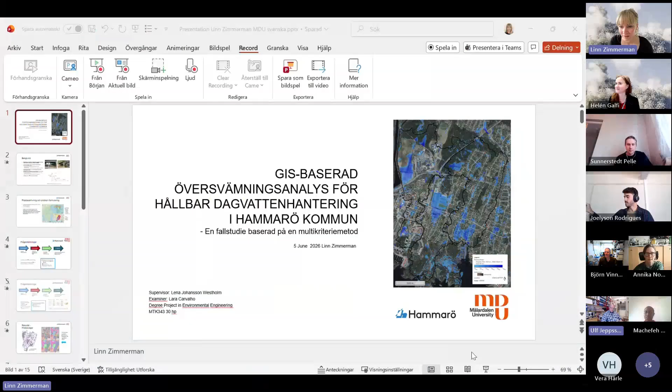And Linn, I am asking you now to share your presentation, and I hope it will work out now. Yes, okay. I will put in presentation mode. Let's see. Okay, so do you see it now?

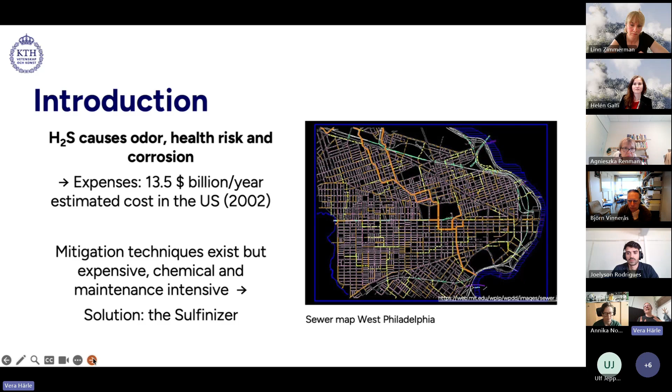There are mitigation techniques for it, but they are expensive. They tend to be chemical or maintenance intensive. There's not too much literature or research about these mitigation techniques under field conditions. Most of those are in laboratory conditions. And then also combined treatment is not as much explored. And so in my thesis, I looked at the Sulfinizer, which is a mussel shell gas filter for hydrogen sulfide.

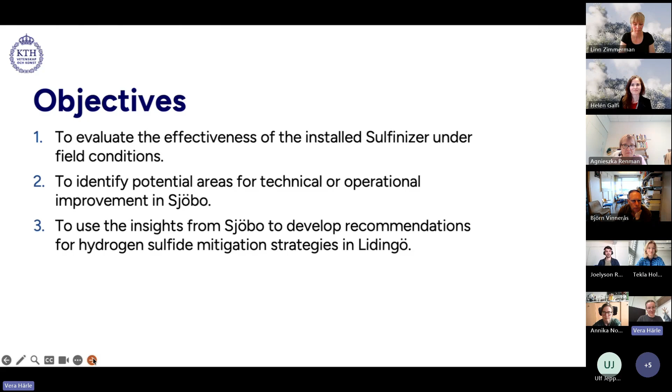So my objectives: I had 2 case studies. The first 2 objectives are for the first case study, and there we go to Sjöbo, and they have 5, I think, installed filters. So we'll look at how effectively they work under field conditions, but also what technical or operational improvements we can do. The second case study I did was in Lidingö, where they have issues with hydrogen sulfide. I did measurements there and then recommended some solutions, but I'm not going to talk about that more.

So how does the Sulfinizer work? On the side, you can see a drawing of it. Basically there's a fan up there which creates negative pressure. So it sucks the air out of the sewer and leads the air that has the hydrogen sulfide in it through the filter. And the filter is filled with mussel shells, which are a byproduct of aquaculture, and they consist of calcium carbonate.

What happens in the sewer, which causes the deterioration, is that the hydrogen sulfide is turned into sulfuric acid and then reacts with the concrete to form gypsum. In the filter, basically the same thing happens. The calcium carbonate reacts with the sulfuric acid and creates gypsum. So the filter is kind of like a sacrificial material in this case. And so the benefits are that it's chemical-free, low maintenance, and low operational costs.

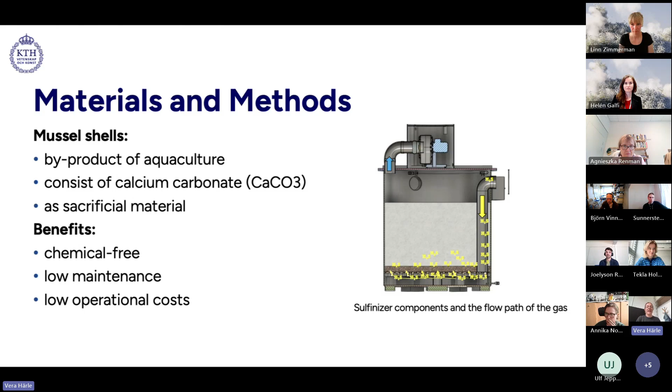As I said, the focus was how effective is it and what are the improvements. The effectiveness we can check in the same locations, since 5 years ago measurements were also done already. So we can compare those and see how the situation has changed. So we're going into the measurement results.

We're first going to focus on the table, which compares the measurements from 2021 to 2026. We can see that the reduction is there, around 67 to 95%. We have to consider, though, that these are gas measurements, which depend quite a lot on where you put the sensors and also the turbulence. So they're not as reliable as, for example, liquid measurements of hydrogen sulfide.

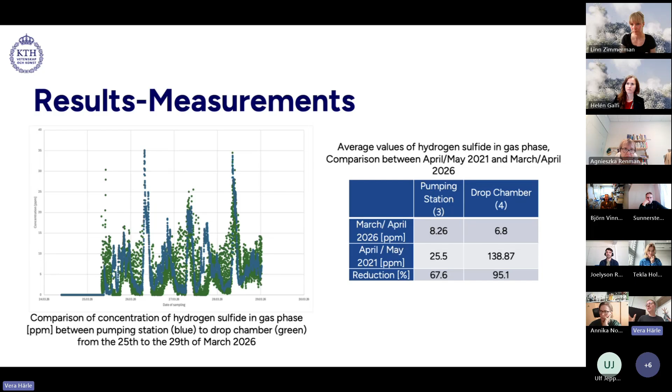So hydrogen sulfide can be in gas phase, but also in liquid phase. So the gas filter obviously can only filter out the gas phase hydrogen sulfide. So the hydrogen sulfide in the liquid phase travels on and then gets released in, for example, a drop chamber where there's a lot of turbulence. So we have an issue that the gas filter can only locally remove the hydrogen sulfide, basically.

So what I did then was to look at the 3 issues that I mentioned now. So the hydrogen sulfide is only locally removed by the filter, the capture efficiency, and as I said, they have corrosion in the pumping station. So these are the 3 issues. What can we do about them?

So for the first one, how can we get rid of the hydrogen sulfide in the liquid phase? We have the possibility of stripping. So basically just getting the hydrogen sulfide out of the liquid phase and into the gas phase by, for example, increasing the air-liquid ratio to facilitate the stripping. We have aeration for this, for example, or hydraulic structures that we can use.

In general, you have to be careful when you do that, because if you do that in a concrete pipe, it can cause more corrosion if it's not captured efficiently. So really, if you do stripping, it should be in a safe environment like plastic pipes or lined surfaces. Because then we come to the second point, the capture efficiency should be improved in Sjöbo. Ideally, before the installation of the filter, modeling of the flow would be really beneficial to get the best possible outcome, basically.

But in Sjöbo, as a solution, we can try to modify the fan intensity to see if we can capture more of the hydrogen sulfide out of the pumping station. And then the third point was the corrosion in the pumping station. So really what we want to do is protect the sensitive structures, which in Sjöbo, the only solution is really to line the pumping station.

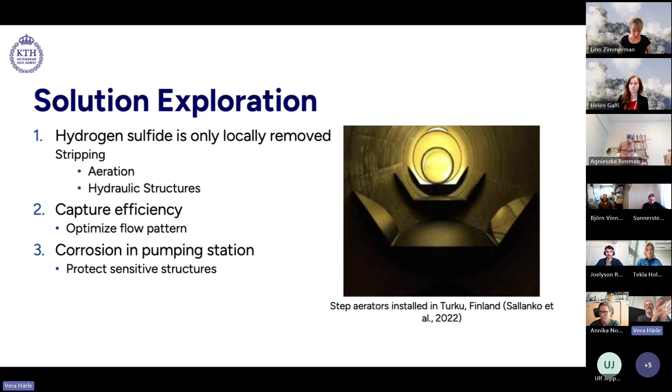But what I am recommending is to really remove the hydrogen sulfide before any sensitive structure. So if we have a pump station, we should have a drop chamber beforehand, made out of plastic ideally, and then have a stripping device that gets the hydrogen sulfide out of the liquid phase and into the gas phase, which then will be captured by a gas filter, for which, for example, the Sulfinizer can be the solution. Yes, so this is in short what I've done.

To conclude my objectives, we see that the Sulfinizer does work. The reduction is estimated to be 67 to 95%. My recommendations, as I said, lining and improving the capture efficiency. And whenever you have a new project with hydrogen sulfide issues, you should remove the hydrogen sulfide before the sensitive structures. You should use a stripping device so that you can use your filter more efficiently and get the most hydrogen sulfide out of the system.

Yes, and in general, modeling is also a key thing for hydrogen sulfide management because it can tell you where issues can occur, and also you can simulate how the hydrogen sulfide will react for whichever strategy.

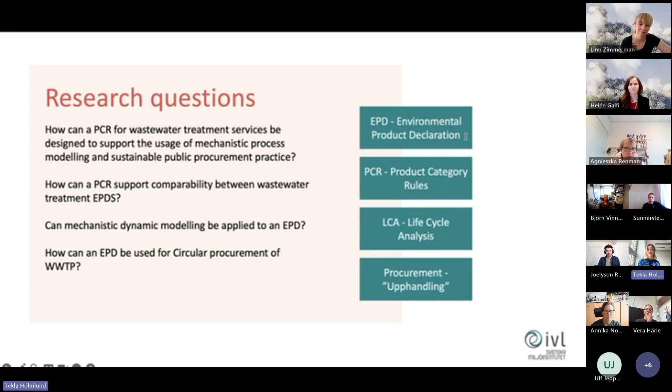I'll go very briefly through theory. A PCR is a product category rule, the written framework that governs how an EPD is produced. An EPD is a type 3 third-party verified environmental declaration under ISO 14025. The LCA behind it covers the full life cycle from cradle to grave.

Then we have Sumo, the simulation process modeling tool I'm using. It's a third generation mechanistic process simulation tool, and I use it to model the Bromma wastewater treatment plant. It allows dynamic influent profiles, seasonal variation, operational controllers, and a carbon footprint calculator.

Finally, the procurement under lagen om offentlig upphandling is the Swedish legal framework that governs how municipalities award contracts. It's the procedure through which EPDs can ultimately drive sustainable decisions in my thesis.

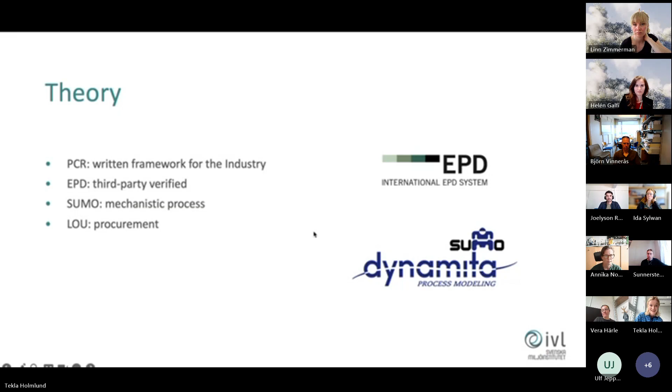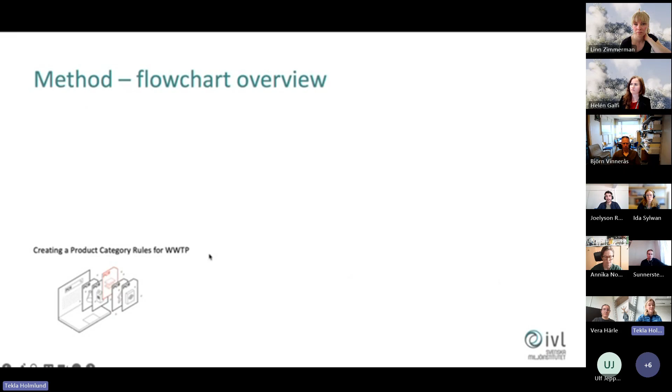As for the method, first I developed a PCR for wastewater treatment services, drawing on EPD International's general program instructions, best practice LCA literature, and consultations with experts in the area. Secondly, I calibrated the Bromma wastewater treatment plant in Sumo, and I ran two full year simulations.

One, which I call the dynamic scenario, has real influent data from 2024 with varying flow, temperature, COD, TN, TP, and DO controllers that respond to ammonia levels. The other scenario was a constant scenario with flat average influent, representing how LCA in the wastewater sector is typically calculated today.

Third, I used this dynamic model to actually create an EPD based on the previous PCR. At last, I used this case study of Bromma and the EPD to analyze how this could be applied in procurement.

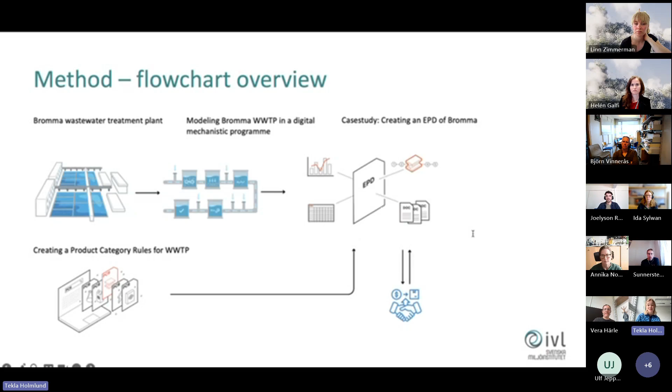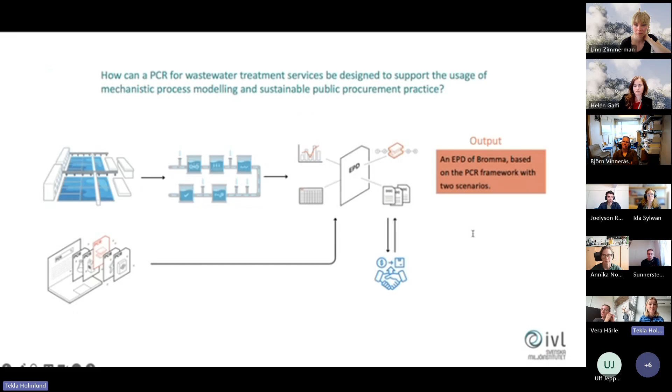This answers my umbrella research question. The actual output is an EPD of Bromma based on the PCR framework with two scenarios, and recommendations for best practice and application of a full PCR, digital mechanistic modeling in LCA, and EPD in procurement.

So then we go to the results. I would be happy for you to look through the entire PCR, please let me know if you want to, but I'm going to present the most important points.

The PCR was divided into three categories, so-called chain stages: a full wastewater treatment plant, a water line, or a unit process. This was done to ensure scope aligned with comparability, because we don't want to compare apples with pears. The functional unit also allows for flexibility for the three chain stages.

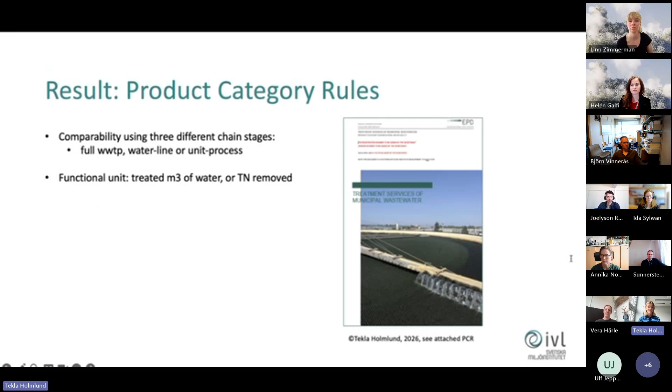It was either a cubic meter of treated wastewater, or in Sweden, total nitrogen removed, 1 kilogram of it.

The data quality section presents that mechanistic processes with calibrated data and actual data inputs should be used and validated as primary data due to technical validation and annual and seasonal representation.

A so-called sibling EPD can be created in the EPD International program, and that is an EPD for an upcoming product not yet used by the same company, allowing for assessment after the service has been established. This would fit the wastewater treatment sector very well.

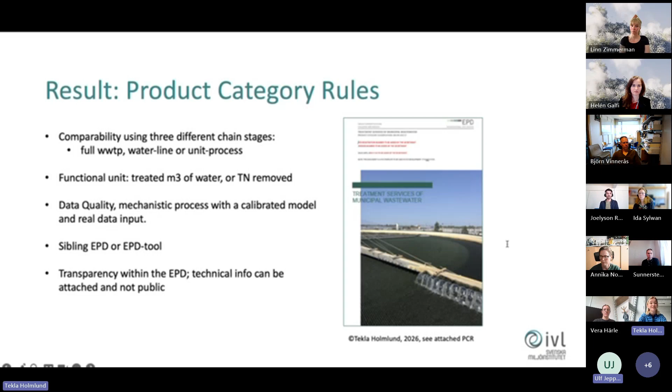There's also an EPD tool that can be used by a company, pre-verified, and usable for several different services or products. The PCR also presents that even though technical transparency shall be reported, specific technical details do not have to be published publicly.

Here are the results from the mechanistic modeling. This is only the influent flow, Q, which has a maximum, minimum, and average value in the dynamic inflow, compared with the constant inflow, which is just a median flat value.

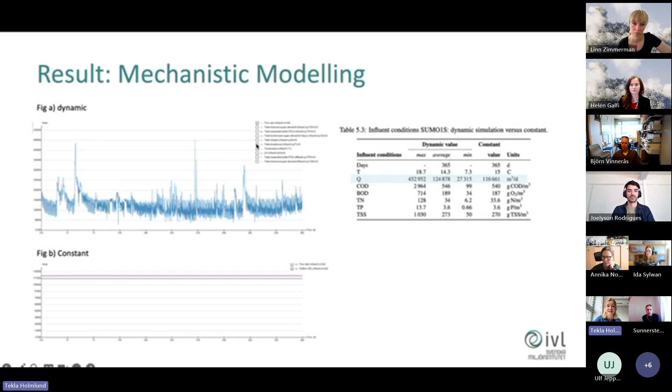As you can see, the loads also varied during the full year. The COD is different, the BOD is different, and it varied between the two scenarios.

The aerators are fully on the entire time, and this creates excessive nitrification, which also uses a lot of energy. This is actually not representing the real case.

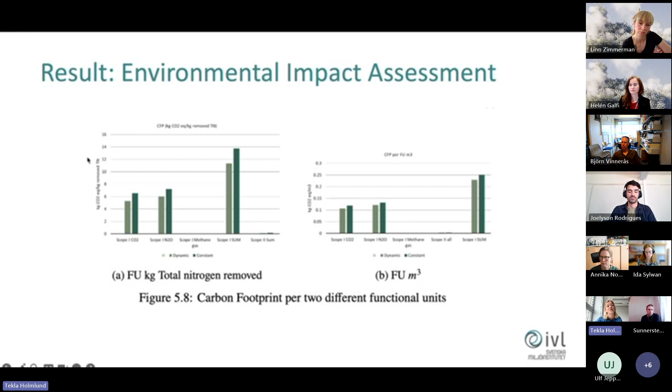For the actual LCA and the environmental impact assessment, here is the summarized carbon footprint abstracted from Sumo. The dynamic simulation has a lower carbon footprint in every category, in both scope 1 for each emission and in scope 2. Here are the summarized comparisons between all environmental impact assessments.

The most important factors for wastewater are, of course, eutrophication, acidification, but also global warming.

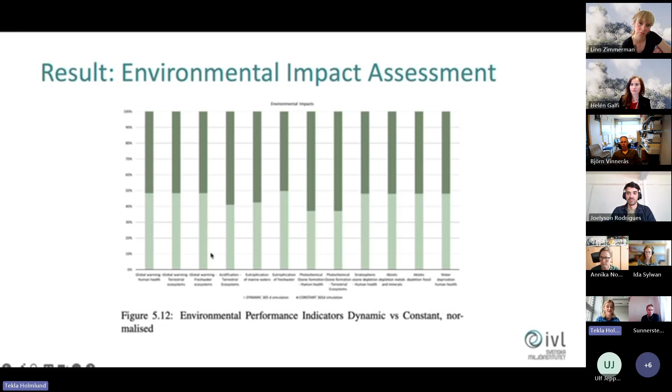As a conclusion, my final takeaways are that there is a possibility to apply an EPD on wastewater treatments. The PCR allows for flexibility, but the contractors have to be clear and concise, which the PCR will assist them with. Dynamic mechanistic modeling will help the EPD in terms of comparability and feasibility.

The EPD procurement could be done either through supplier qualification criteria or product qualification criteria. I believe the EPD will help municipalities and the wastewater sector to actually reach the sustainability goals and objectives of the Urban Wastewater Treatment Directive. I also think the PCR is definitely a step on the way of digitalizing the industry.

And thank you, that was it.

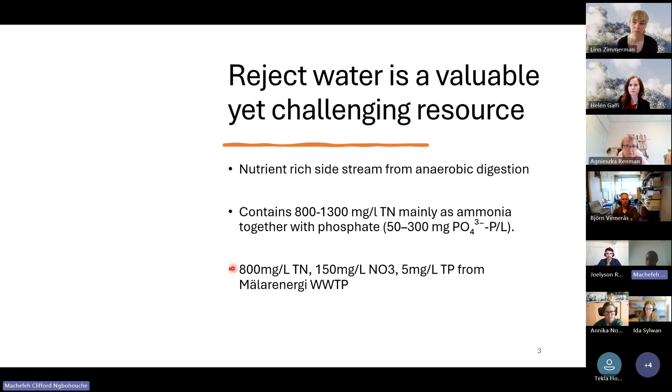The wastewater treatment plant from which the reject water was obtained contained approximately 800 milligrams per liter, 150 milligrams per liter of nitrate, and 5 milligrams per liter of total phosphorus. Here's an example image of the reject water used for this analysis and the experiments.

Ozonation as primary disinfectant is highly effective against resistant pathogens, with no persistent chlorinated disinfection byproducts, unlike chlorination. However, it is non-selective, so oxidation risks nutrient loss, like ammonia oxidation to nitrate, which is more readily taken up by plants.

Now, why it is non-selective is that its bioavailability can be reduced. For example, ozonation can degrade organic ligands, such as synthetic chelators that bind multivalent cations. The release of these ions can subsequently lead to the precipitation of insoluble phosphate salts, rendering the phosphorus less available to plants.

The selectivity challenge and research aim: the main selectivity challenge was to optimize ozonation parameters to maximize pathogen removal while preserving nutrients such as total nitrogen, total phosphorus, and phosphate for irrigation.

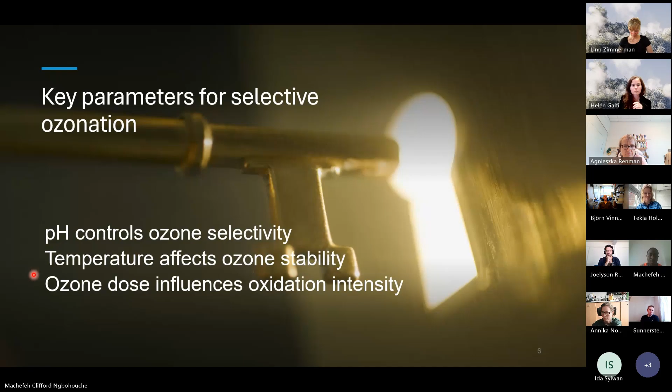Methodology overview: ozone generation using corona discharge, one of the first processes used to generate ozone. Then we used the ozone created in dissolved water and analyzed it by iodometric titration for the concentration of ozone produced.

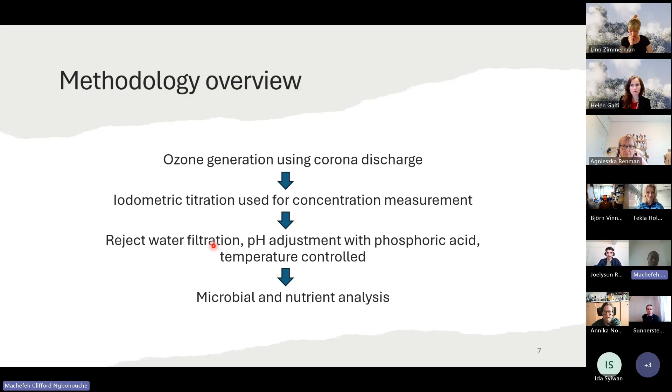Then we carried out the disinfection process, which entails reject water filtration, pH adjustment with phosphoric acid, along with temperature control based on the experimental parameters. Then we moved on to microbial and nutrient analysis. This was a step-by-step overview of how the methodology was carried out in the lab.

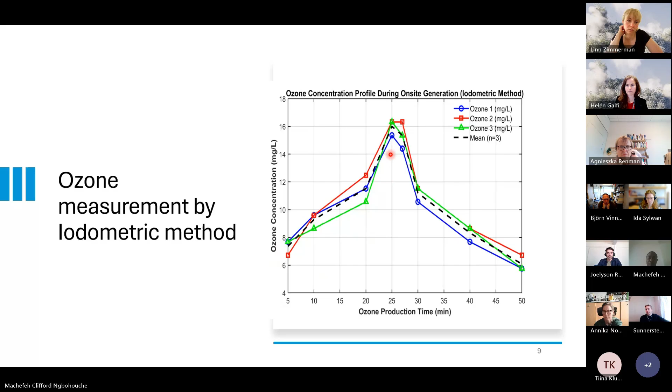This helped us analyze the E. coli inactivation performance, carried out through Eurofins analysis. The samples were collected and sent to Eurofins, an accredited external laboratory, ensuring standardized measurements of bacterial concentration.

These were the results we obtained. We had different runs, and we realized run 1, run 5, and run 8 all met the EU Class B regulation, while none of the treated conditions achieved the EU Class A standard of less than 10 MPN per 100 milliliters, indicating a need for further optimization.

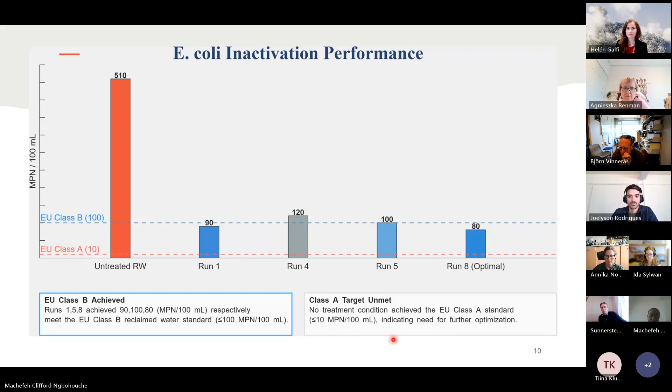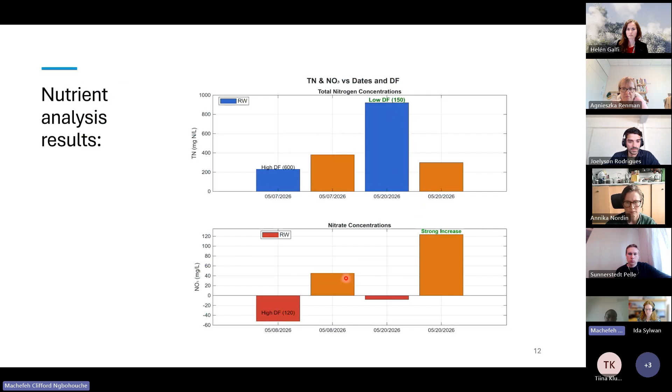So here we have the nitrate concentration in the reject water and in the ozonated water. We ran the nutrient analysis for total nitrogen, and the reject water was analyzed on separate days. This analysis was done so that we could evaluate how the concentrations of total nitrogen vary over different periods of time. We realized it didn't vary that much, because the averages didn't quite change from each other.

We realized run 8 actually had the maximum concentration retained. So this shows run 8 was actually the best performance for E. coli, and it actually contains some nutrients, total nitrogen, in the ozonated water after disinfection.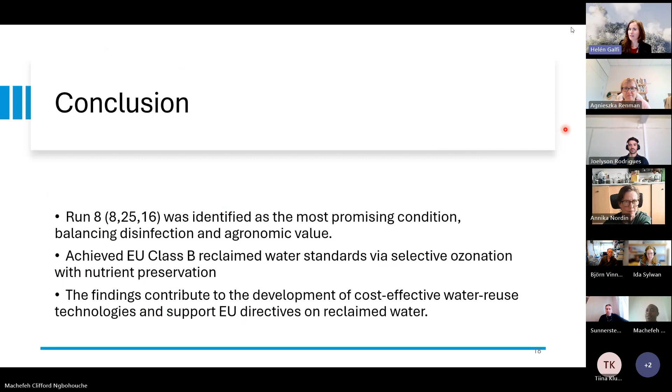It's really good to see the microbiology work and also how to reuse reject water for irrigation. And from a Swedish or cold climate perspective, it is interesting to look not only at E. coli but also enterococci, these two indicators.

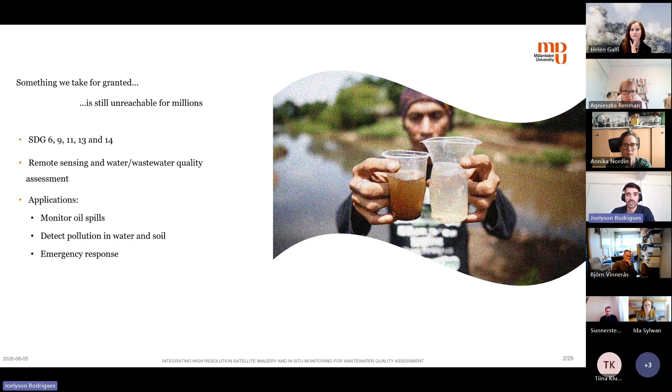Remote sensing has been widely applied across many fields and has been used to monitor oil spills, detect pollution in water and soil, and for emergency response. However, there is still a gap in its application and understanding when it comes to wastewater systems, especially where the water is still undergoing treatment. And this gap led me to investigate and try to answer the main question, whether high-resolution satellite imagery combined with in situ monitoring can provide a practical and lower-cost way to assess wastewater quality in resource-limited treatment plants. And I was using data from 2 wastewater treatment plants in Portugal.

So in summary, remote sensing is the use of satellites or other instruments, such as airborne platforms, drones, cameras or sensors, to capture the interaction between light and matter in the electromagnetic radiation range.

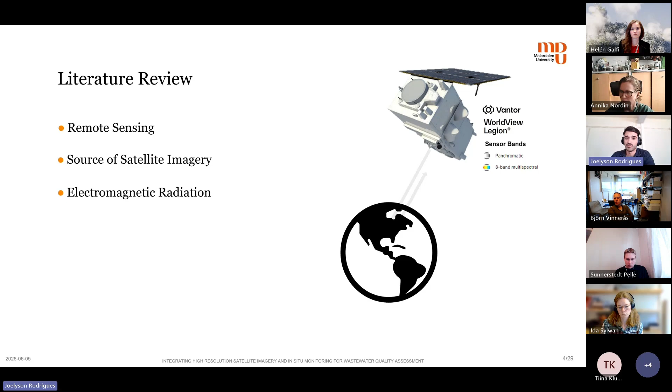Let's take an example of our image dataset satellite program, WorldView Legion 5, which was released in February 2025. As mentioned before, this is a high-resolution sensor that captures images in 8 multispectral bands with a spatial resolution between 40 centimeters and 1.5 meters. In other words, these satellites can capture an incredible level of detail. It could potentially detect something as small as a dog walking down the street or even a bird swimming in the water. Wait until the end and you're gonna see it.

Quick method overview. First, I prepared the data and simplified it using PCA, also for understanding the variability and heterogeneity of the data inside the images. Then, after image acquisition from the provider, I proceeded to QGIS to process the satellite images and extract the relevant information. Using this, I built and validated models to estimate the parameters, developing both an equation and a simplified index.

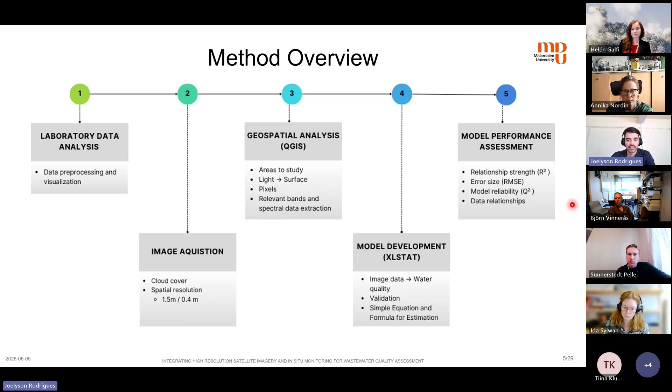The equation applied PLSR, partial least squares regression, to perform these models. And finally, I evaluated the models based on accuracy, error, and prediction ability. In the end, 9 images were selected with 14 samples.

This PCA here shows how COD and TSS behave together, also with the observations from the images. We can clearly see that the secondary clarifiers are close together, meaning stable conditions, which makes sense, with clearer water than the primary one. Oh, sorry, I forgot to say, I performed the analysis in the primary and the secondary clarifiers. For the primary clarifiers, the samples and images are more spread in the plot, showing higher variability, as we can also see in these graphics here.

Outliers were removed, and results were supported and analyzed using operator input based on rainstorm waters or technical difficulties and challenges throughout the analyzed period.

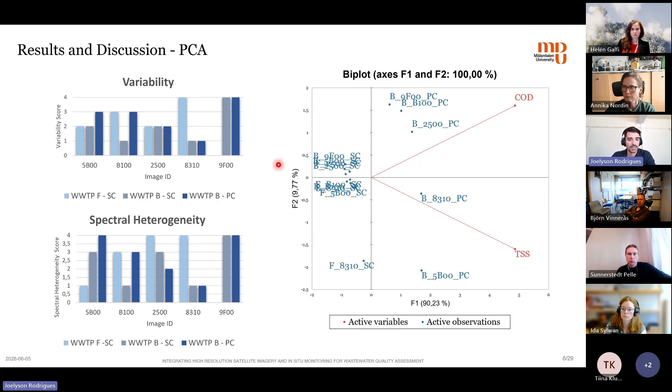We then proceeded to the spectral signatures plot. This is called a spectral signature, for those who don't know, and it has this name because each type of matter behaves differently when interacting with light. In a way, it's like a fingerprint. That's why we can also call them spectral fingerprints. We're gonna see these plots from all images from 2 different plants, plant F and wastewater treatment plant B. This is for the secondary clarifier.

Overall, the differences in spectral curves between the analyzed images are minimal. We can see low reflectance values at shorter wavelengths, such as band 1 and band 2, followed by a gradual increase towards band 6, and finally the highest relative peak occurring in band 7. This is a pattern for all secondary clarifier analyses.

This work also makes the comparison more reliable because 80% of the image dataset used the same image, the same layer of the satellite image, meaning all images were taken under the same atmospheric conditions. So the differences we see here are mainly due to how the plants operate and the influent characteristics, not external atmospheric factors. So the secondary clarifier curves are very similar. You see only small differences.

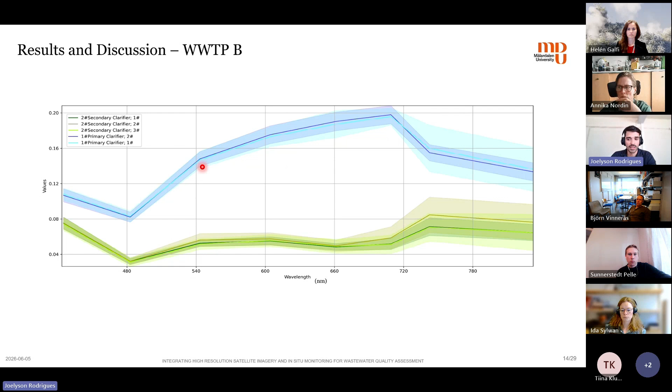The curves on the top are the primary clarifiers, where you see a clear increase in reflectance, especially in the visible range, which is the green, yellow, and red, bands 3, 4, and 5. This is because there are more suspended solids and organic matter, which make the water reflect more light in the visible range than in the secondary clarifier.

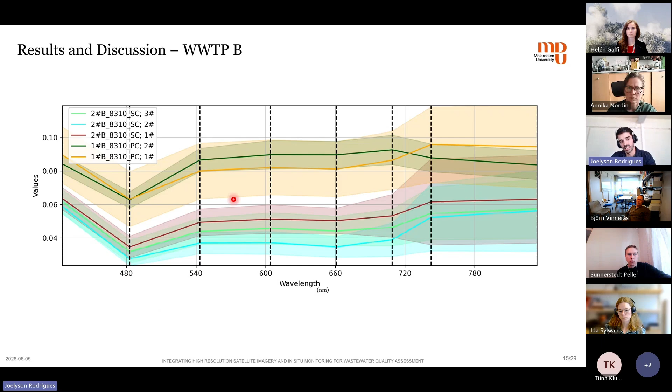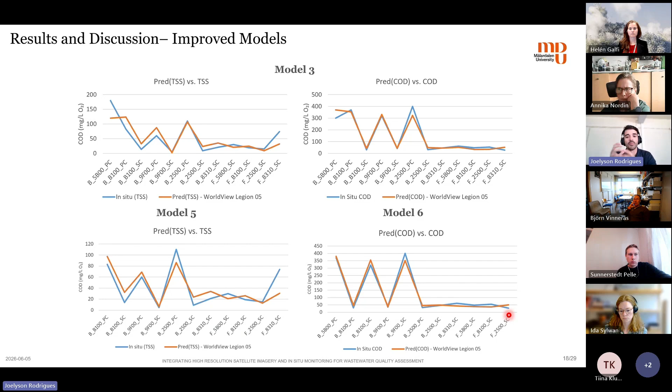We see that model 6 almost predicted exactly the values of the real samples, and these were then applied in QGIS with the equation to estimate both parameters and to compare them with the index results, which I proposed here with the help of the model to identify the bands that carry the most signal, the most information in the images. So I used variable importance in the projection and also the PCA dominant bands to propose four indexes, which I ran in a simple linear regression with the parameters.

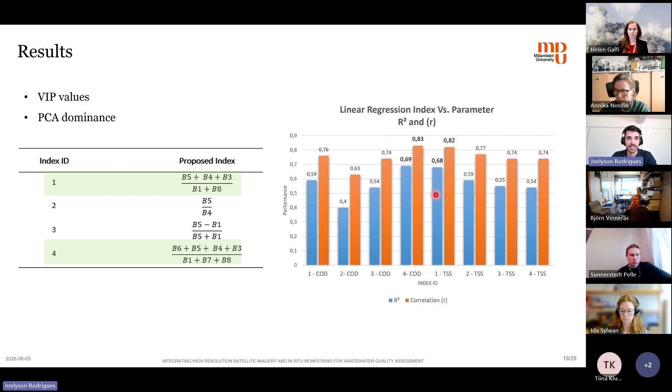Index 4 and index 1 were the ones showing the highest correlation with the parameters, so I selected those two to compare with the PLSR. The main difference between the methods is how each one reacts to the data. PLSR gives more stable maps overall because it uses more information, and the index shows more variation since it's based only on simple ratios and reacts more to local changes.

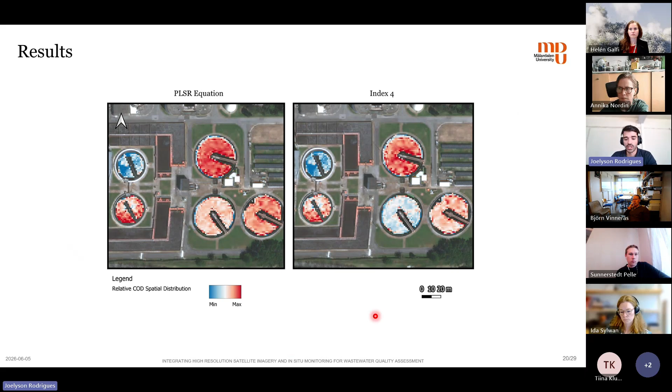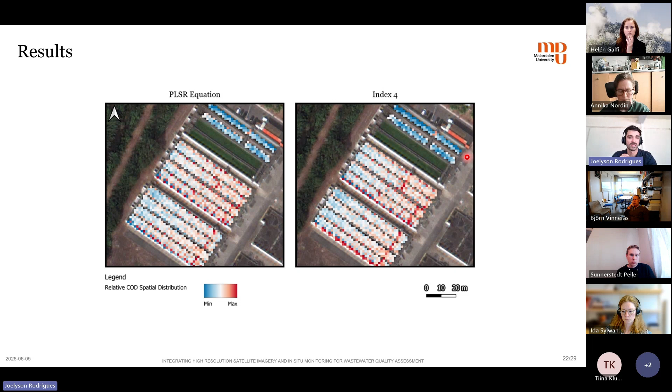Validation using independent tanks, such as these two tanks up here, called 11 and 12, confirmed that both methods are generally reliable, especially under these controlled conditions. These two tanks were deactivated at the acquisition time of the image, and both methods successfully captured the expected treatment behavior in these tanks, which is low COD, since this is mainly accumulated rainwater.

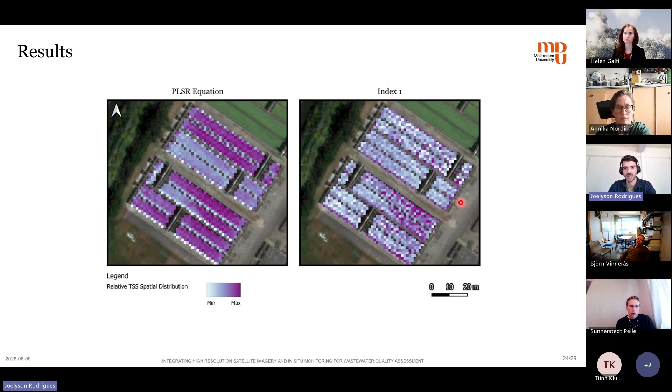Before concluding, I'm going to address a few limitations. The data set is still limited due to the recent satellite launch in February last year. And there are some timing differences between satellite images. I got a maximum of two days temporal mismatch, and also some challenges with varying surface water conditions.

The conclusions and applications for the results are combining multispectral image data with operator knowledge to improve understanding, and that both methods capture the different treatment stages well, but they behave differently. We could also detect unusual surface conditions like scum accumulation, which can enable quick response, like with an alert, a sensor, to tell the operator something is wrong with this equipment somehow.

This approach can also help to identify which treatment plants or downstream areas need priority attention. And the method can be adapted, of course, to other plants with similar processes or based on effluent characteristics, and overall supports reporting and improves transparency.

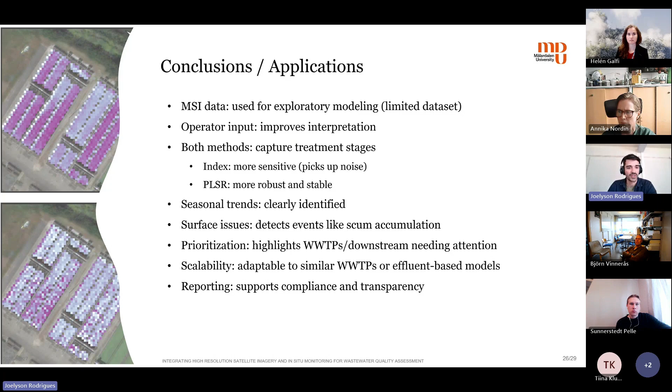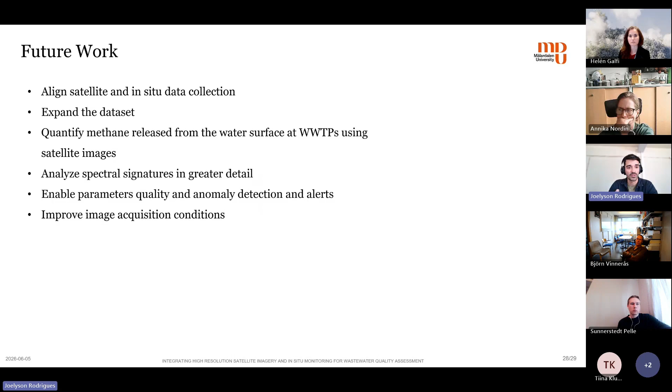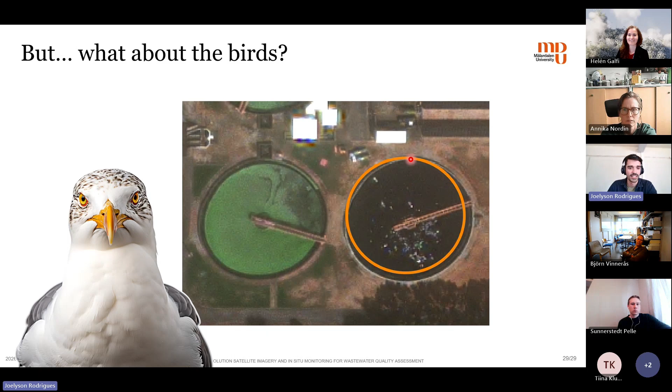For future work, to align the satellite and in situ data collection at exactly the same time, you can track the satellites and see the exact time and date that it's going to pass above your plant. And other work, such as quantifying methane release from water surfaces using satellite images. But now you may be asking, what about the birds that I mentioned in the beginning? You can see them right here swimming in the secondary clarifier.